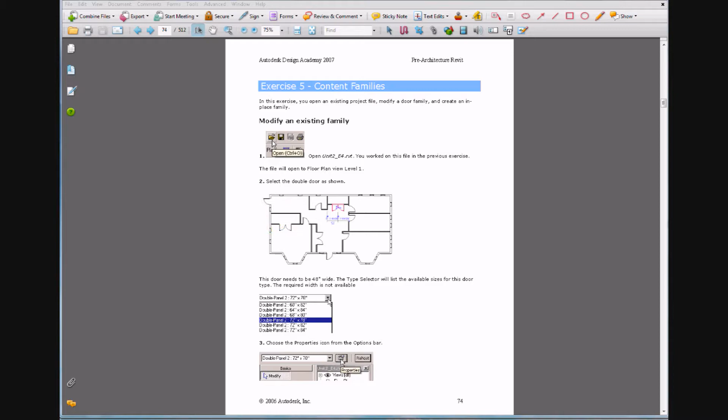Alright, in this next exercise we are going to modify the existing components. Go ahead on the pre-architecture Revit, page 74, with your house, and select the double door. So I'll go ahead from my house and select the double door.

Go ahead and select the properties icon from the options bar, and we're going to change some of these parameters around. On page 75 of the PDF, we're going to select Edit and New, then select Duplicate, and change it to 48 by 80. Select OK.

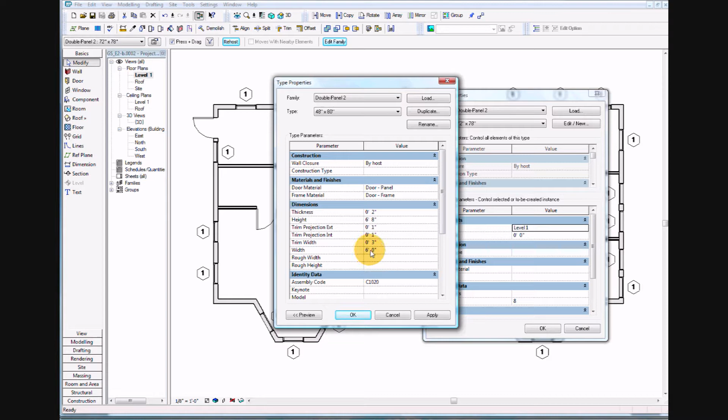Then on page 75 we're going to edit the height. Go ahead in the dimensions, height to 6'8", and the width to 4 foot. Select OK twice. And there the door has been reduced in width and changed in height.

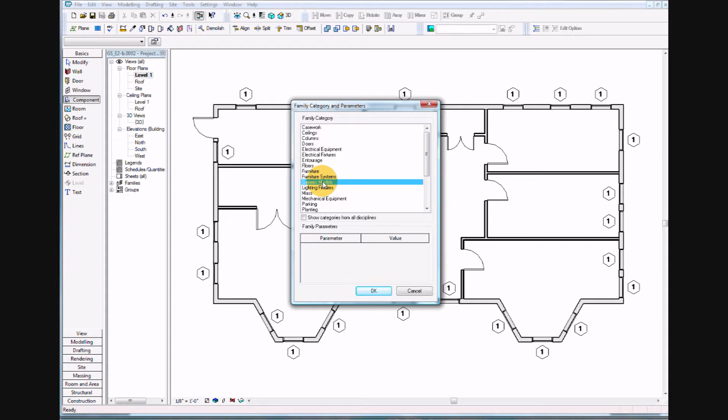On page 76, we're going to create a component in place. Go ahead and choose component from the basic tab of the design bar, and select create in place. Choose generic models, and select OK.

We're going to go ahead and type in Hall Clock, H-A-L-L-C-L-O-C-K, and press OK.

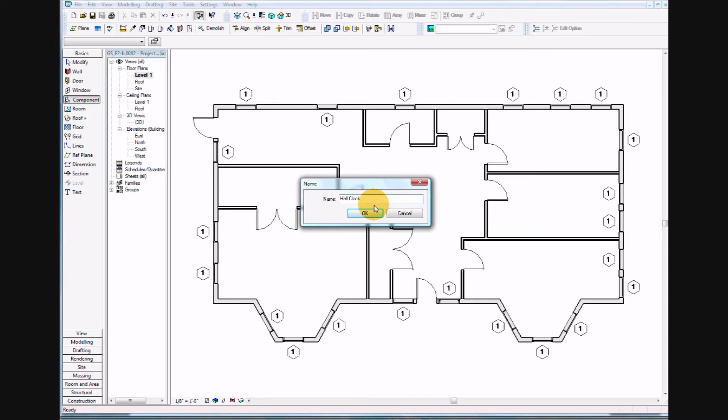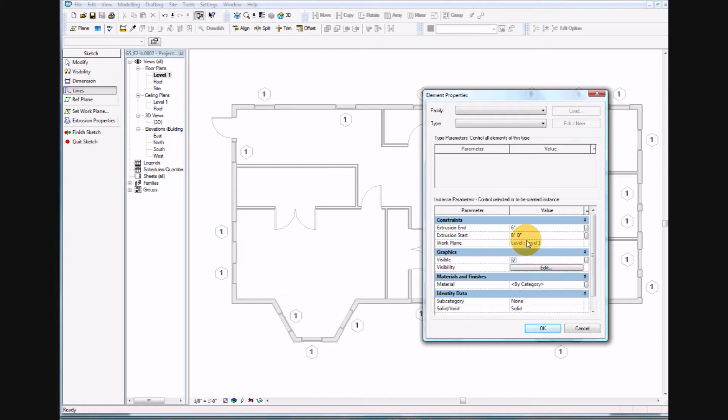Then in the design bar, under solid form, go ahead and select solid extrusion. Select extrusion properties, set the extrusion end to 6 inches, and check the constraints here. 6 inches. Select OK.

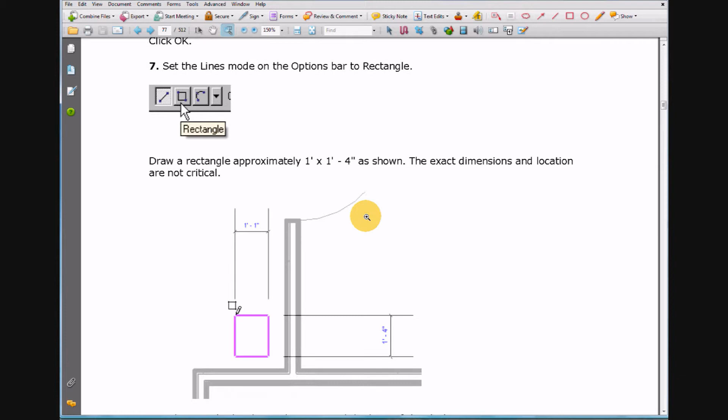Select the lines on the option bar, choose rectangle, and draw a rectangle approximately 1 foot by 1 foot 4 inches as shown on page 77. I'll zoom in a little bit and put it right here, scrolling my mouse to zoom in. I can also type in 1 foot 4 inches as I go. Go ahead and select Finish Sketch - that's going to be the base of my clock.

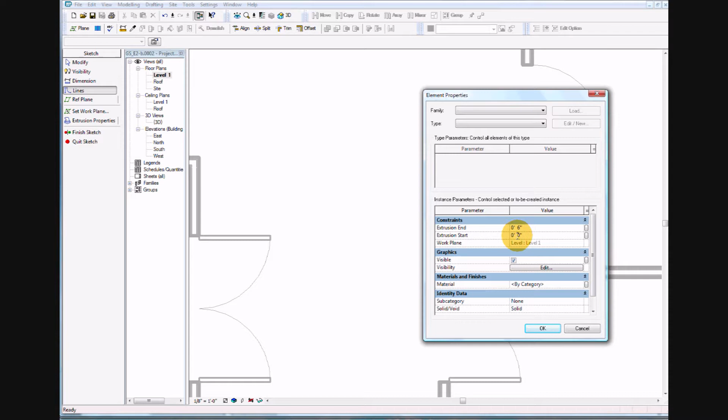Then go ahead and select solid form, solid extrusion, and on the extrusion properties set the start value to 6 inches, and the end value to 5'6". So basically we're making a rectangle from the base and going up - it's starting at 6 inches, which goes on top of the base we just made, which is 6 inches high. Select OK.

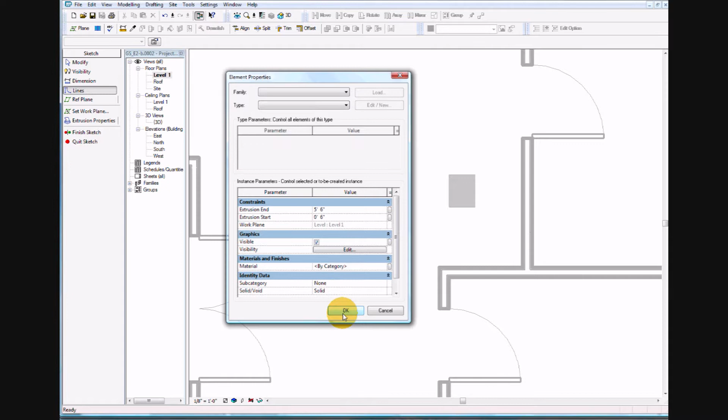Now it needs to know the size of where we're putting this, so we'll go ahead and select the lines and do a rectangle with an offset of 2 inches. Okay, we're on page 78.

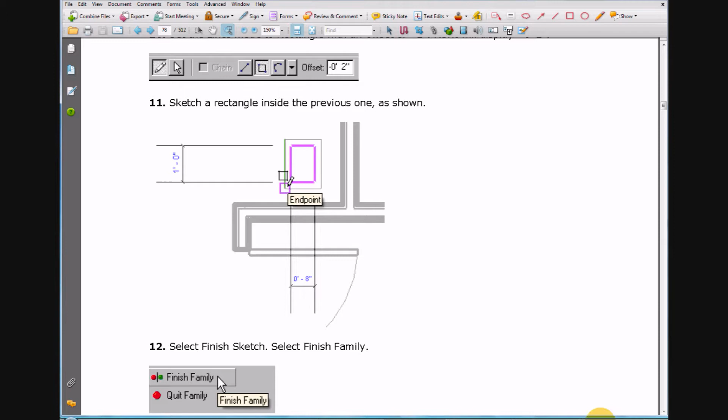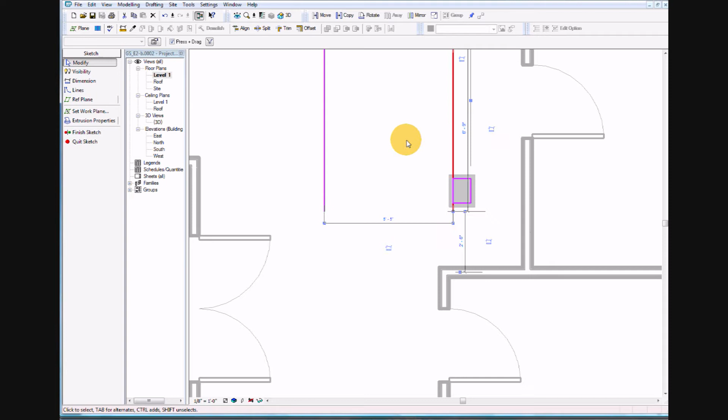Okay, and then go ahead and select Finish Sketch, and that portion is completed. Then go ahead and select Finish Family and save your work.

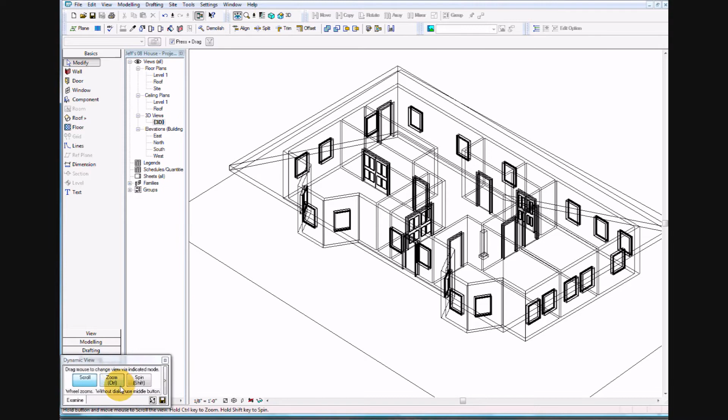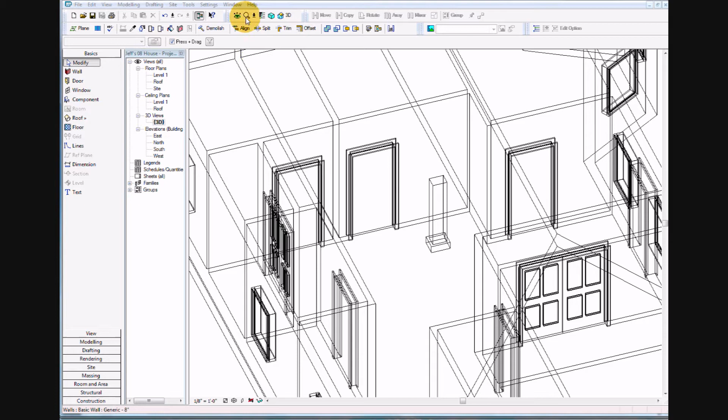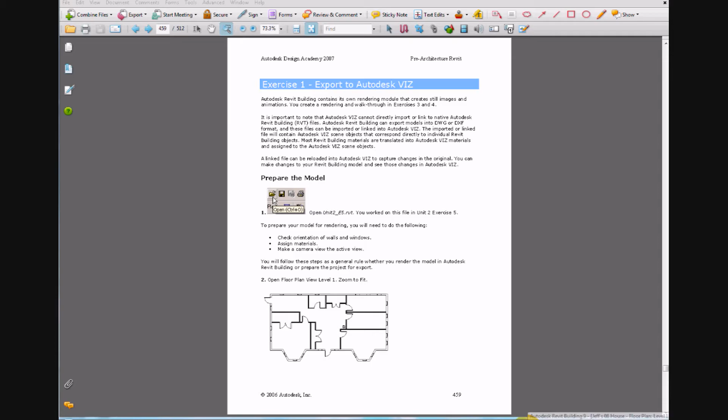In this lesson we're going to learn how to export our house to Viz or 3ds Max. However, we need to make sure we have some of the wall items selected with the proper material so we can get the effect that we want. Go ahead and open up your Pre-Architecture Revit to page 459, and we're going to work on our house. Let's get the floor plan view and zoom to fit - I already have my house open.

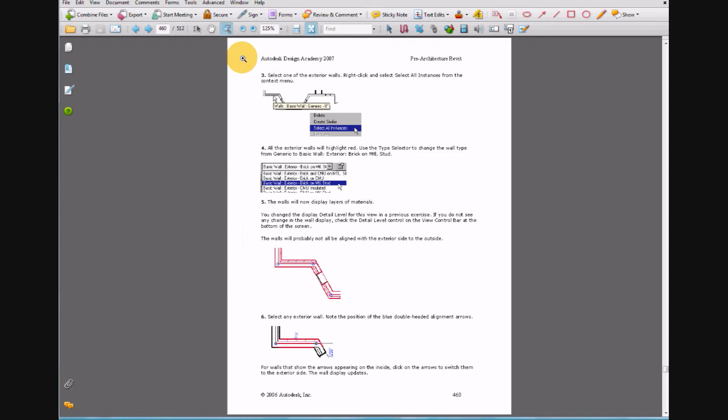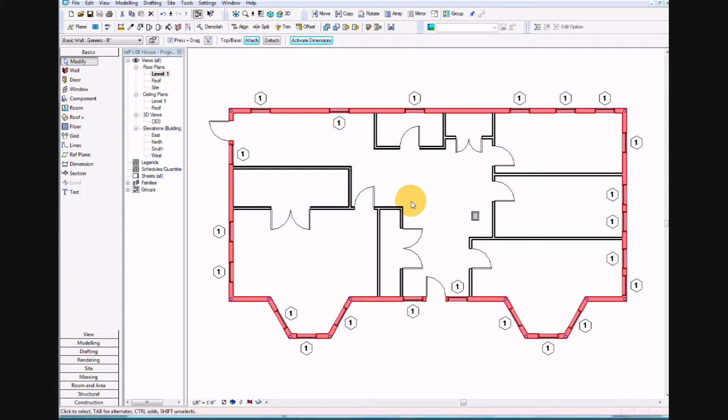On page 460, it's asking us to select all our exterior walls and right click and select all instances from the context menu. So let's go ahead and do that - not the interior wall, but the exterior wall. Right click and select all instances, and then we're going to change the wall from generic to brick on metal stud.

Okay, so we've obviously changed these walls. If you're not seeing what is on my screen, make sure that your detail level is at least at medium.

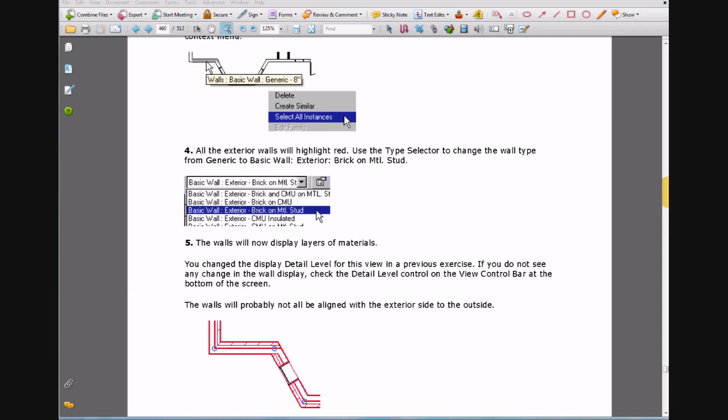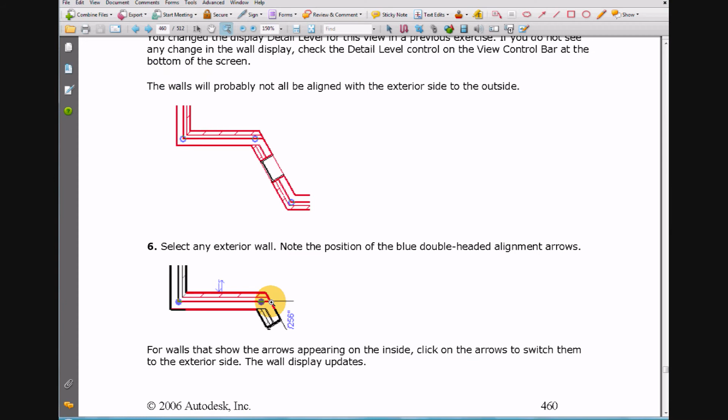Make sure that your walls are aligned. For example, if they are not completely flush, like Mr. Smith's, if you notice here, the outside of the wall isn't flush. If it's not, you're going to want to modify that. You can take the position and pull and stretch the wall until it works.

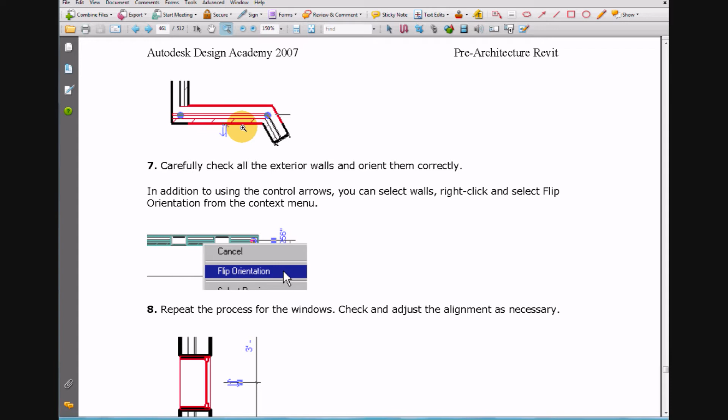And the other thing is, if the brick is not on the outside but on the inside, you can also flip the orientation. For example, right click, flip orientation. Don't want to do that in this case, so I'll undo that.

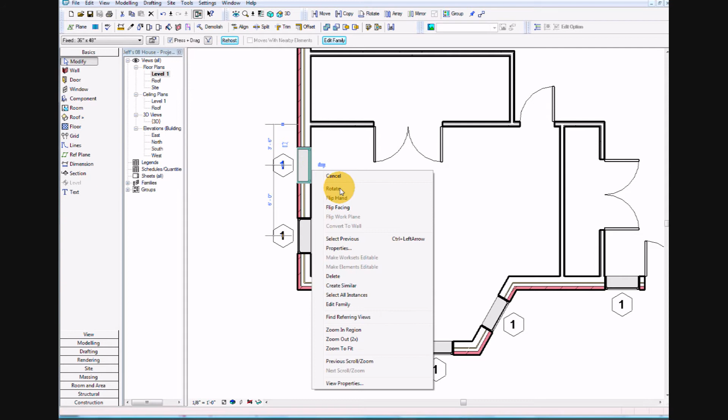And the same for the windows. If you find that the windows are not oriented correctly, flip facing, right? But we actually want it the other way. So make sure that everything's on the outside of your house, and go ahead and clean this up.

Before we export, if you export in the level 1 or any of the floor plans, it will actually export as a two-dimensional object, which some people may want for drawings, but in this case we want to make sure that we select the 3D view.

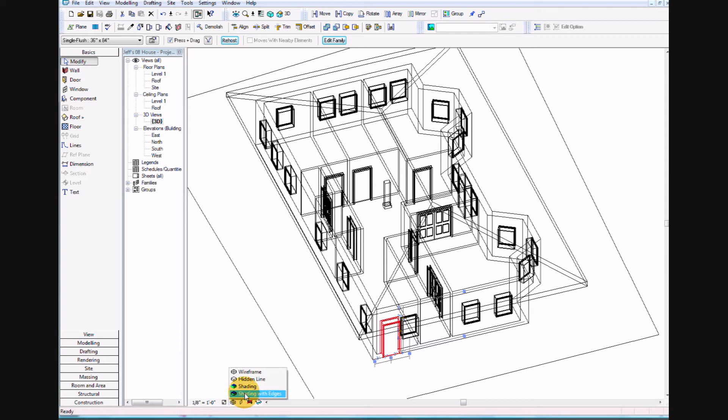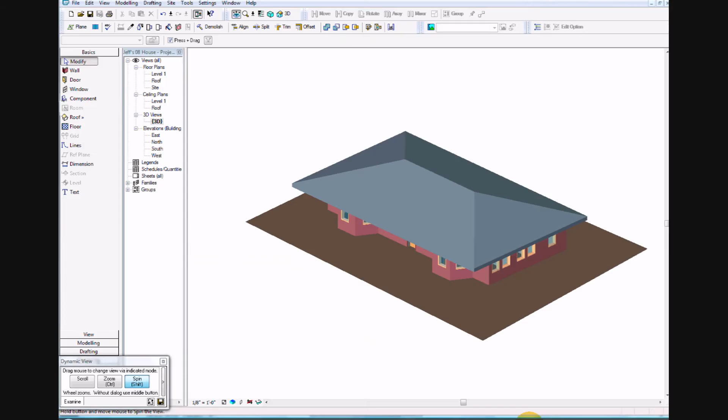And then select the properties. I can right click for the properties, or I can come up here and hit the icon, and we're going to select for material by category. We want to select site grass, and say OK.

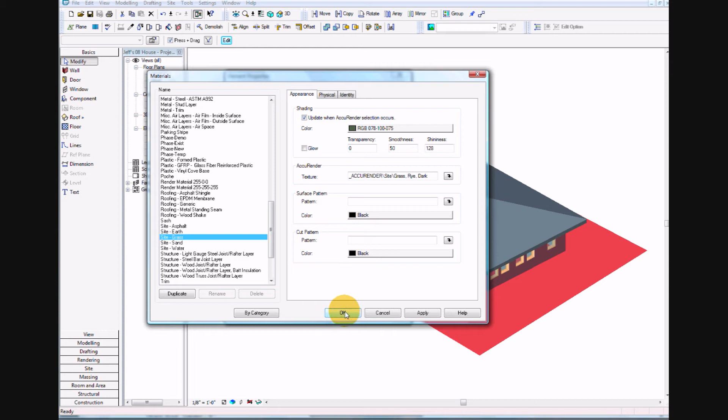And then we're going to go ahead and select the roof, and do the same for the roof, except not grass in this case. It wants a wood rafter. I see it right here. Actually, we don't need to go into properties. We can do it right here.

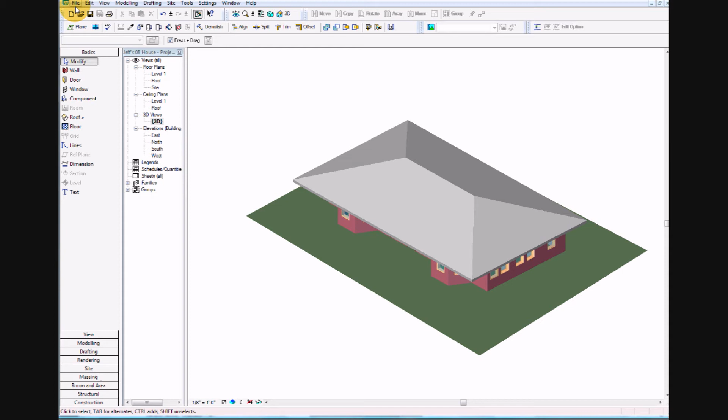Okay, and go ahead and save your work. Now when we save it, for now, go ahead and save it as, well, let's go ahead and do the CAD formats. It's always good to save your work.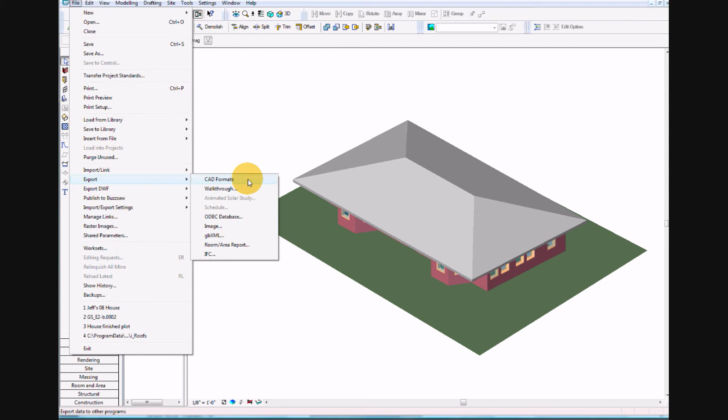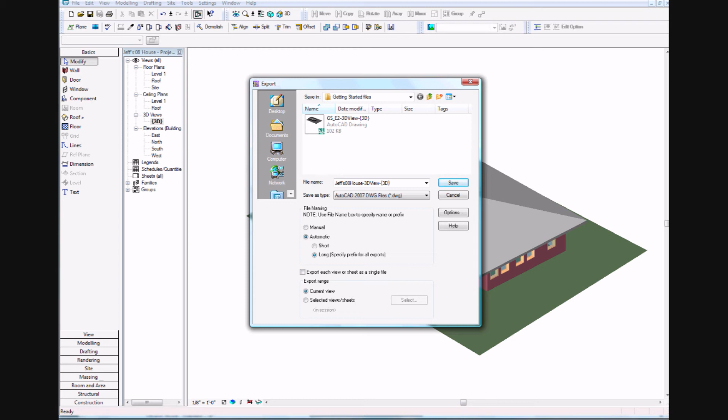Okay, so go ahead to Export. Go to File, Export, CAD Formats, and we want to go ahead and select a file name. You can go ahead and use your default name here. Now it's saying 2004, you can do that. I've been using 2007 and it seems to work fine. We have a 2007 version of Autodesk. Okay, so just go ahead and save that.

Okay, so now we want to go ahead and open up, it's asking us to do Viz. You can do Viz or 3ds Max. I'm going to go ahead with 3ds Max. We should be on page 463, and once we're within either Viz or 3ds Max, there's something called a File Link Manager, and that does exactly what it sounds like.

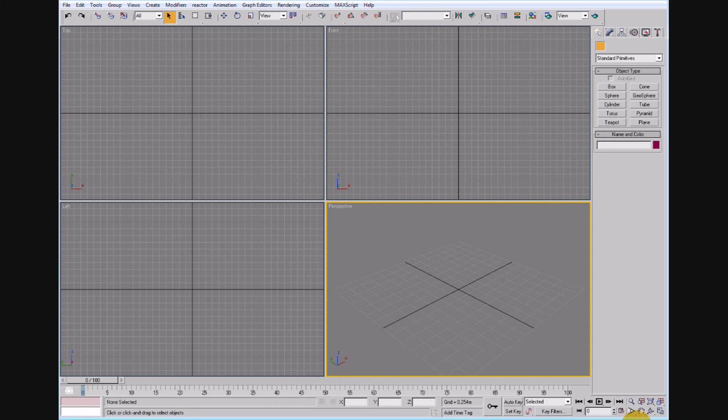So for example, if we import a Revit building and we change it, it should in theory go ahead and link. So File, and then select the File Link Manager, and we're going to go ahead and open up the house that we exported.

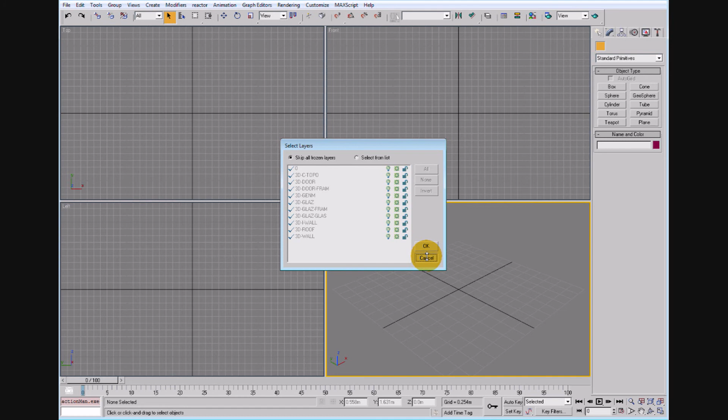Okay, and we're not going to go ahead and select layers, but there are times when you might want to not bring in layers, especially in certain applications. So go ahead and select attach this file, and then go ahead and save this file.

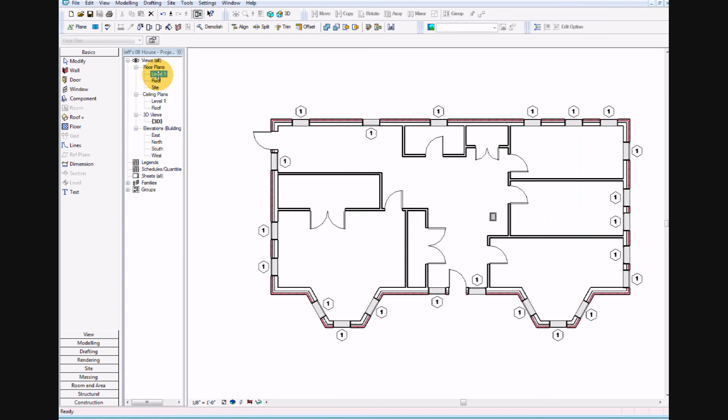We'll go ahead and save it as the same name, but as a 3ds Max or Viz file. Okay, so once you have it saved, we're going to go back to the same file, and we're going to go ahead to level 1, on page 465, and the bottom of 464, we're going to go ahead and change the front windows.

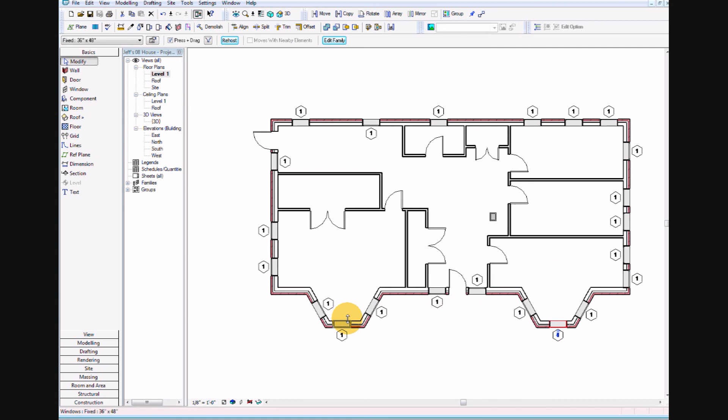So I'm going to go ahead and select both front windows. To 36 by 72 fixed. Okay.

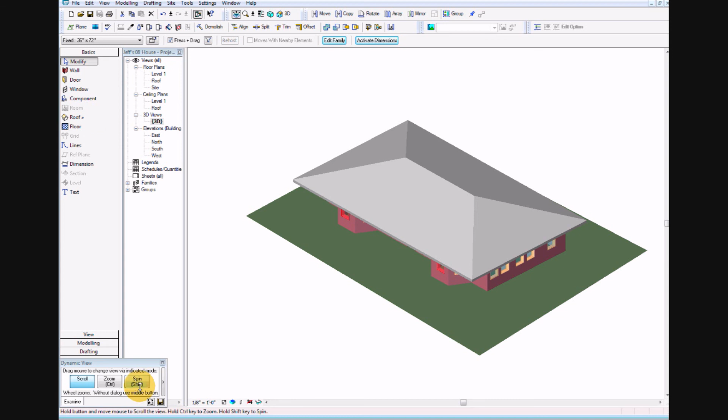Open up the 3D view. Let's make sure that it actually did in fact change that window, that view on that. There we go. Okay, so those windows are definitely bigger.

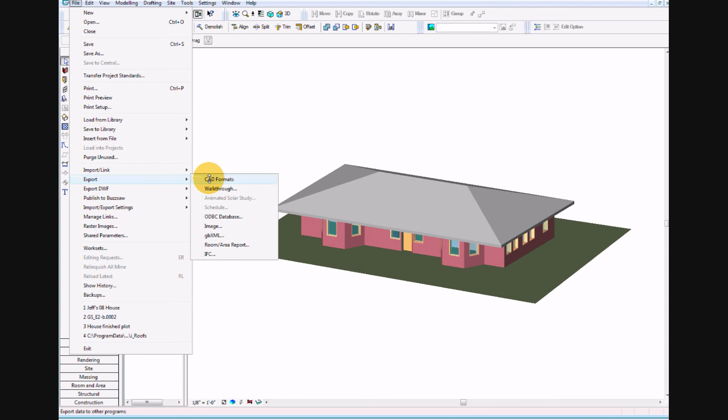We're going to go ahead and save the file, and then go ahead in the file, we'll do the same procedure as before. Export, CAD formats, and we're going to want to do the same files we did before.

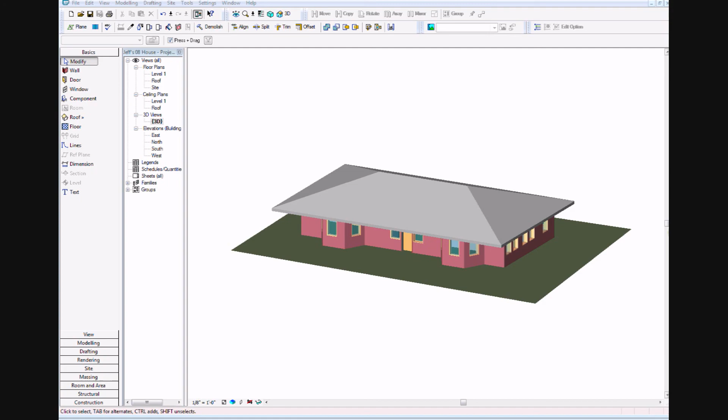So go ahead, I'm going to do exactly the same as I did before, 2007, push save, and I do want to replace it, so press yes, and then go ahead to Viz or 3ds Max and go to the File Link Manager, go to Files, and then select Reload.

Let's look at these windows. And there we go. You see those windows were reloaded.

Now the nice thing is, guys, if I add trees or if I've done additional work, I don't have to start all over. And I can tell you a lot of my students last year would have liked to have known about this feature, but I was keeping it a secret.

Okay, and that is the completion of the first exercise on exporting your house to a DWG format.